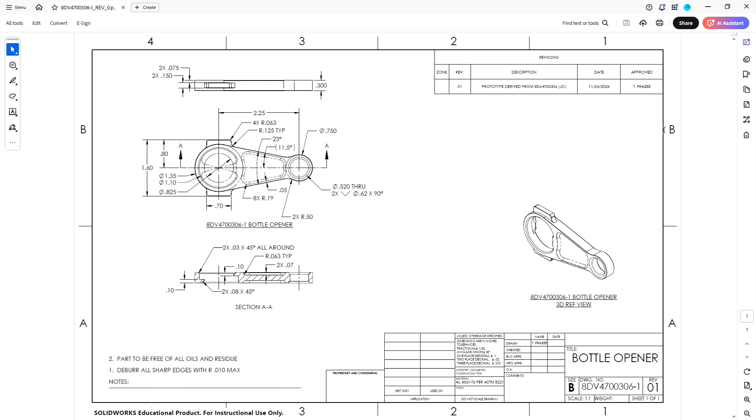We're going to start in the front view, and we're going to model the outside perimeter of the part first, the part that makes up these two big circles and the lines that connect them. We try to keep our initial sketches simple. It helps with change. And if we put our chamfers and fillets on at the end, then we're able to suppress those if we need to for machining.

Let's go to Fusion, and you're going to save your file as the part number, revision, first initial, last name. Make sure you save. That starts the auto saving for if you crash.

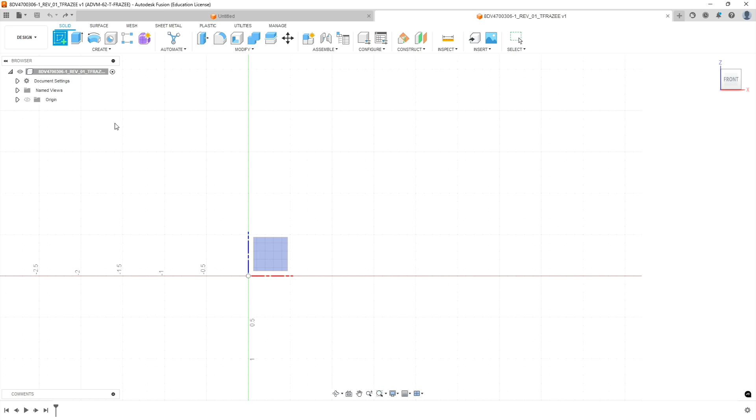The first features we're going to make are those two circles with the lines connecting them. So we're going to do a sketch, and we're going to start off in the front view. That's our primary view. We're going to pick origin, draw a circle on it, then draw another circle off to the right. You'll notice I'm not paying attention to the sizes, it's not important at the moment. We're going to put some relationships in, making sure those are horizontal to each other on their center line.

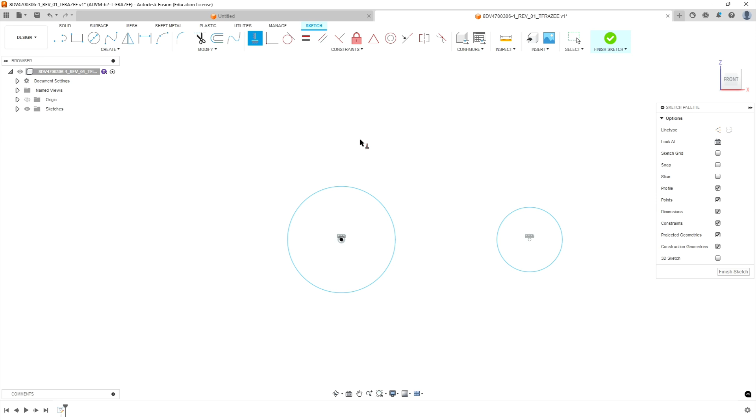Now we need to dimension them. Our first one, if we look at our drawing, is 1 inch 350 thousandths. Let's dimension that: 1.350. Our second one is 3/4 of an inch in diameter. Let's dimension that, 0.75 for 750. We now have them the correct diameters.

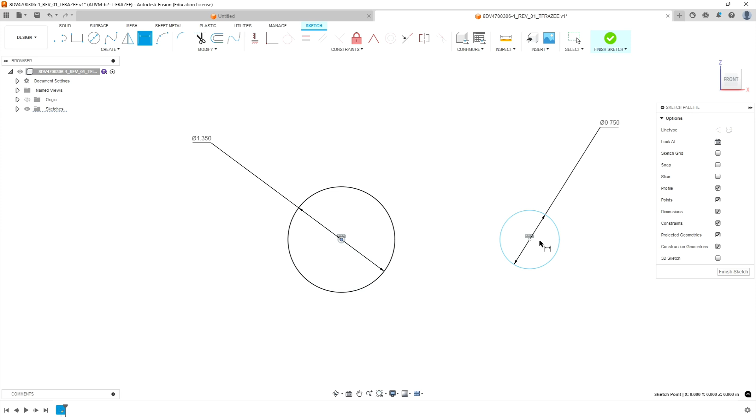Now, how far apart are they? The centers from here to here is 2 inch 250, so we're going to put that dimension in. Next, let's look at our lines. We have two lines make up the outer side. They're 23 degrees apart, and they're 11.5 degrees off center line, meaning it's proportional.

We're going to draw a line out in space, hit escape. Let's draw us another line out in space, hit escape. We're going to attach one end to the big circle, attach the opposite end to... we didn't want that relationship. We're going to attach the small end to the small circle. Now we're going to put in some relationships, so we're going to go tangent with the large circle. But if you look at the drawing, it's not tangent with the small circle, so make sure you don't put that relationship in by accident.

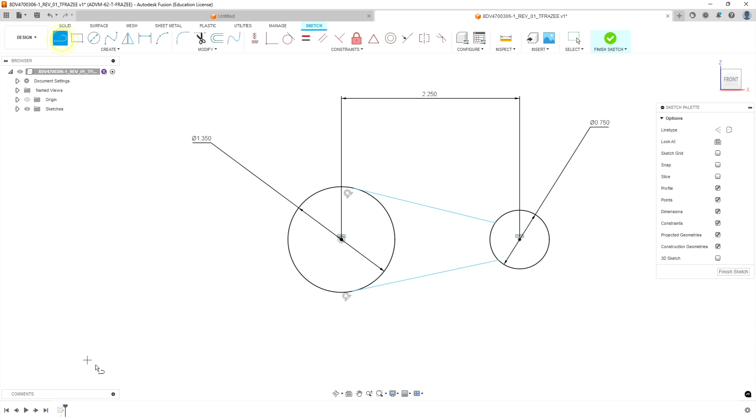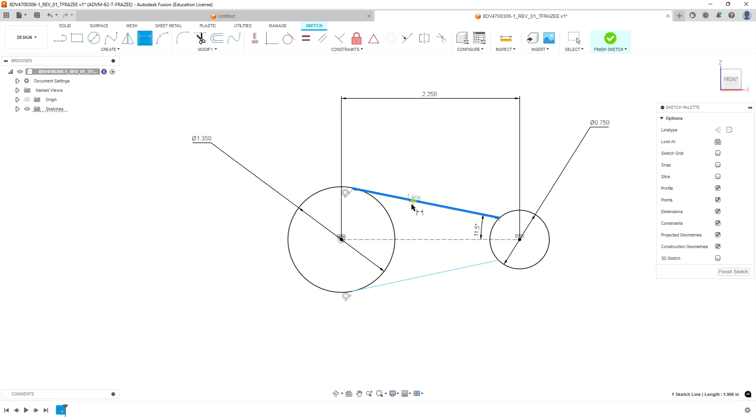Now let's draw a line from the center of each of the circles, and then right click on that line and make it a construction line. This is going to be used for our angular dimensions. So we're going to dimension from the center line to the first one and put in 11.5, which is half of our angle, and then we can dimension to the other line and put in 23 degrees, so that makes that proportional.

This should be, if you look at your sketches, a fully constrained sketch. Now you'll probably be tempted to put fillets in and stuff, but especially with this non-tangent edge, you could lose the definition you need there, so I'm going to choose not to do that.

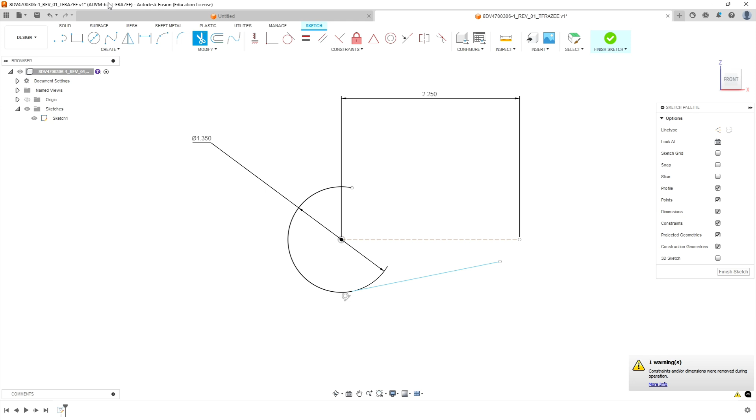Now let's trim away what we don't need. Don't need the inside of that circle, don't need the inside of that circle, don't need the inside of that circle. And you don't want to do that - I trimmed something I didn't want to, and we're going to trim inside of that circle. Okay, so this is the shape we're starting with.

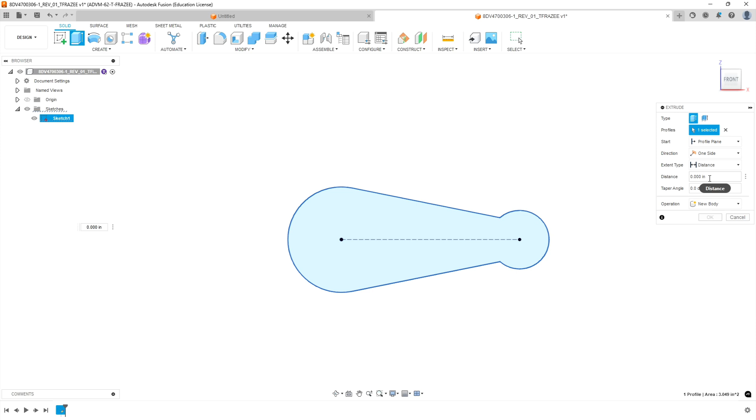We're going to go finish sketch, then we're going to do an extrude, and it's going to automatically select the sketch that you were working on. How thick is our part? Look at our drawing - in the top view, it says it's 300 thousandths thick. So we're going to put in 0.3. And if we rotate this to 3D view, it now has thickness. Looks like from this angle, it looks like an exclamation point. There we go, let's OK. Now we have our base shape.

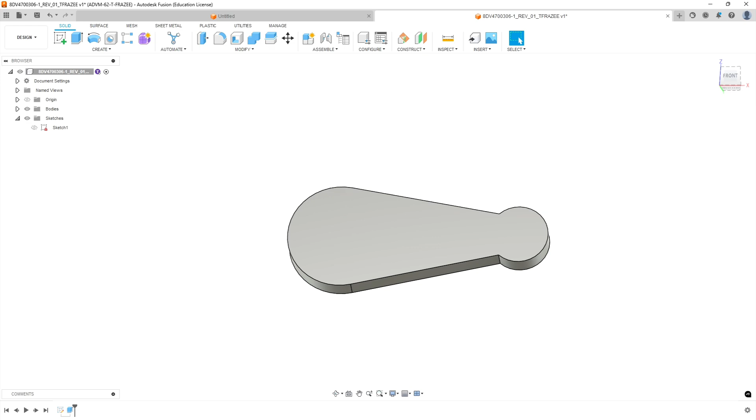Now, let's look at our outside perimeter and see what we're missing. We have this hammerhead looking shape. It is 700 thousandths wide by 1 inch 600 tall, and that feature is centered around what is origin in our model, or the center of this larger circle.

This feature we have to create a different way. It is right on center line in the top view, and it's 150 thousandths thick. So how we're going to approach this is we're going to actually model this mid-plane of this part.

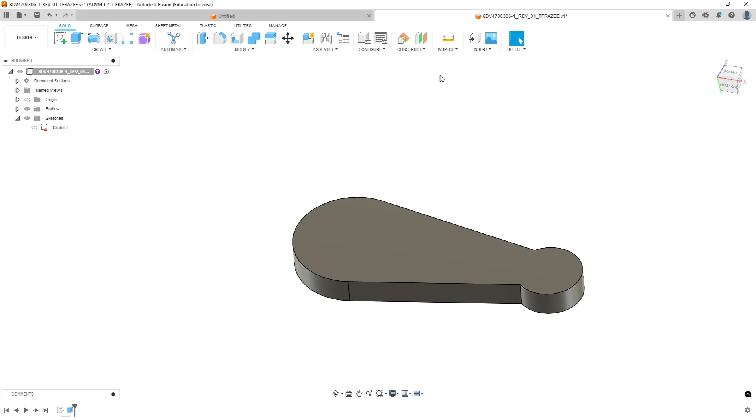Okay, so to do that, we first need to make our mid-plane. We're going to go to construct, and we're going to make a mid-plane. This allows us to select two surfaces, and it'll automatically make a plane splitting it down the middle. So no matter what size, if we do have a design change and we change the thickness of our part, at least whatever's defined on this plane will always be on center line of its thickness. We're going to hit OK.

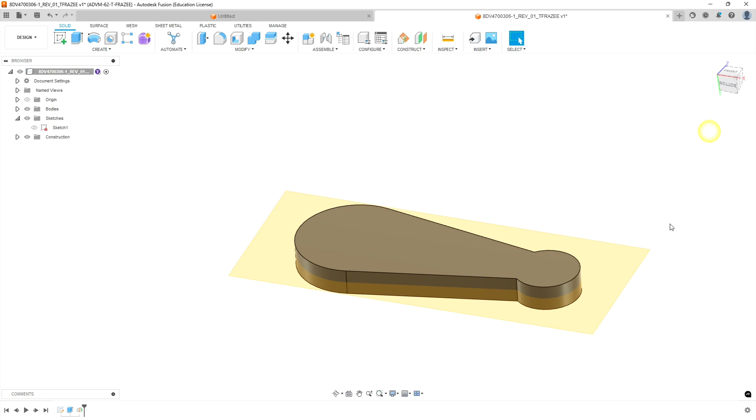Now we're going to create our sketch on that midplane. Let's draw a rectangle, and then we're going to draw a line from corner to corner so we can center this rectangle on the circle. So escape, so that we exit the line tool, right click on our line and make it a construction line, and then we're going to go from midpoint of the line to origin. Looks like I got extra selection there, but anyway, now this is centered on origin.

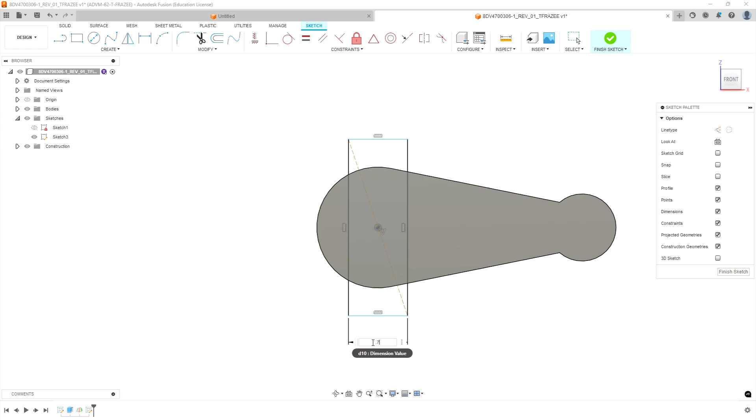Now let's give it its width. So our width is down here in our drawing, was 700 thousandths, and then the height was 1 inch 600. 1.6. Okay, and that gives us our fully constrained sketch. We're going to hit finish sketch.

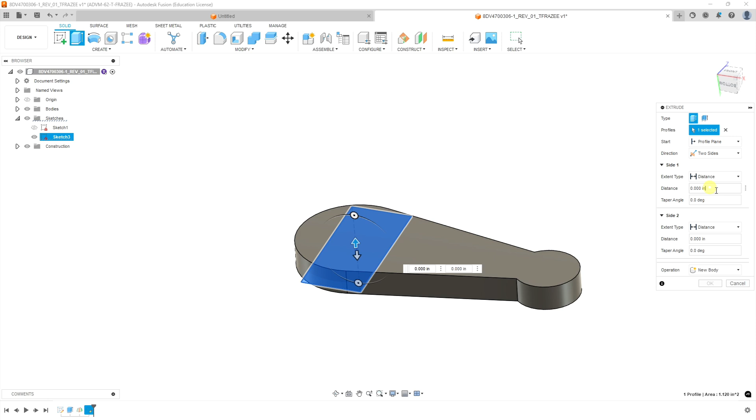We're now looking at it in a 3D view, and we're going to do an extrude, and it's coming from that plane that's right in the middle. So what we're going to do is, instead of one side, we're going to do two sides, and then we're going to split the difference of our extrusion. So our extrusion was 150 thousandths thick. So that means we need to go a distance of half of that. 0.075, that's 75 thou on one side and 75 on the other.

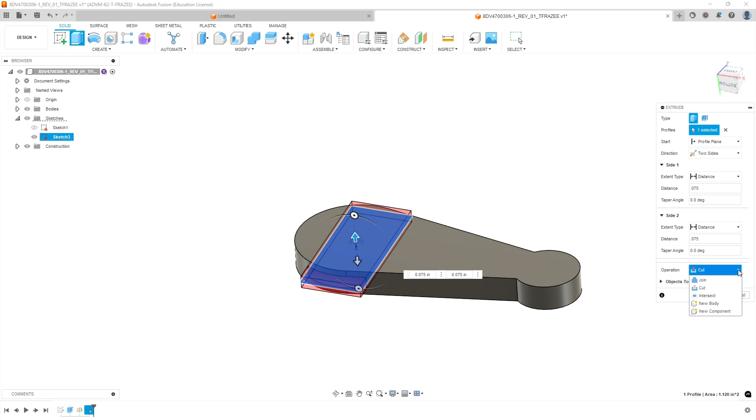Now we could have selected symmetric, then we could just put in the same value once. Guess that would have been smarter. Alright, let's hit OK. And we're not doing a cut. We want to change our type to a join, so it's going to make one body out of this, and we hit OK. There we go. We've got our rough shape of the outside of the part.

Okay, now let's look back at our drawing. We're still looking in our primary front view. What do we have that would be a silhouette? So we've got this cavity here, which is made up of a bunch of arcs, and then we have this hole here. Now we could make this a simple hole, or we could use the hole wizard.

Problem with hole wizard, it doesn't put the countersink on both sides automatically. I'm going to come back and use a chamfer tool to make that. That way when we make the chamfer on one side, we'll make it on the other, and they'll be parametrically tied together. So let's do all the through features first. Let's just start with this hole here.

We're going to sketch on our top plane. We're going to draw a circle. You're going to hover over the circle's edge, and if you bring it to center, it should auto select the center to make it concentric. Now I have noticed in different iterations of Fusion this sometimes doesn't work. Not a big deal, you just come back and make it concentric after the fact.

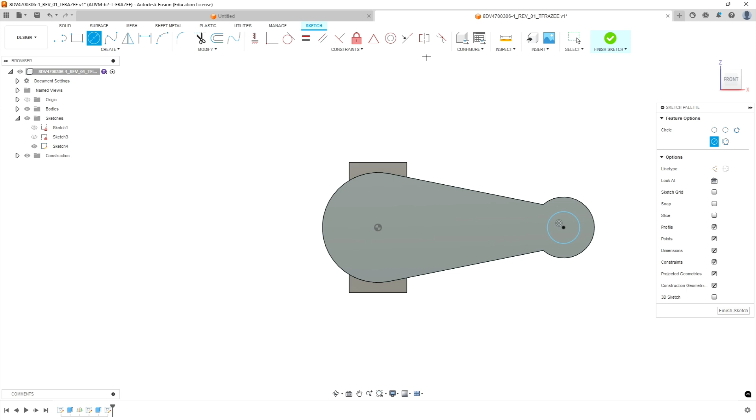Okay, we got our circle, and our basic diameter is 520 thousandths, and it's a through hole. Goes all the way through the part. So we're going to dimension that, and it's going to be 0.52.

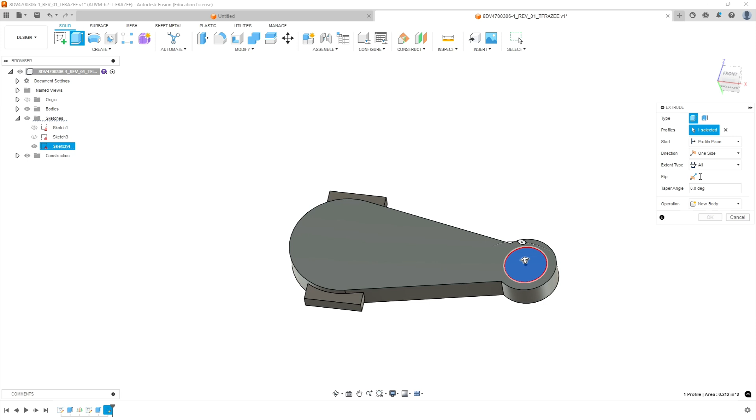We're going to finish sketch, and then we're going to go ahead and extrude that through. You're going to pick on the hole, and we're going to go all the way through, and we're going to flip sides so it should look red like this, and then hit OK. We now have our through hole on the back side.

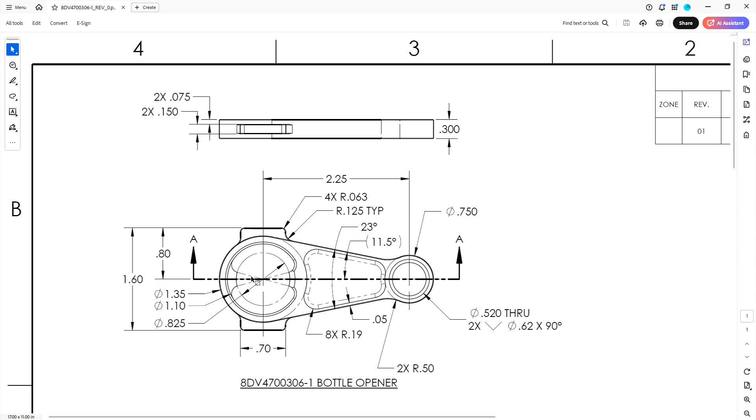Now let's take a look at this more complicated hole we have over here. We're going to do this as its own dedicated sketch. So what we have here is a large diameter, and that's a window through, but then we have a tooth here and another tooth on each side of the part. And the depths of those teeth are defined here. So we're going to end up needing to make cut features from both sides of the part in order to make this come out correctly.

So let's start with what would be the edges of the top of our cutout here. So our first diameter is this 1.10 dimension. Okay, so we're going to work large and work our way down. So we got 1 inch 100 thousandths, and so we're going to sketch on the top plane, and we'll start off by making a circle. Starts at origin, and then we're going to dimension that, and it is

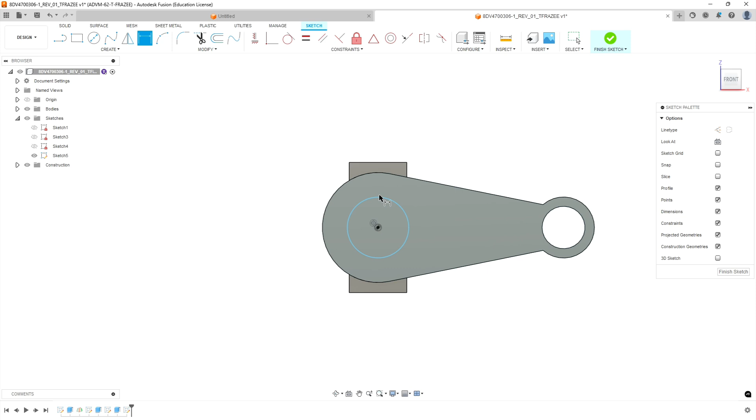1.1, 1.10. Okay, now we have this tooth feature in here that we need to draw on the right hand side because that's in the plane we're working in. And it has an inside diameter called out to it, and its inside diameter is this 825 thou. Okay, so let's draw that circle.

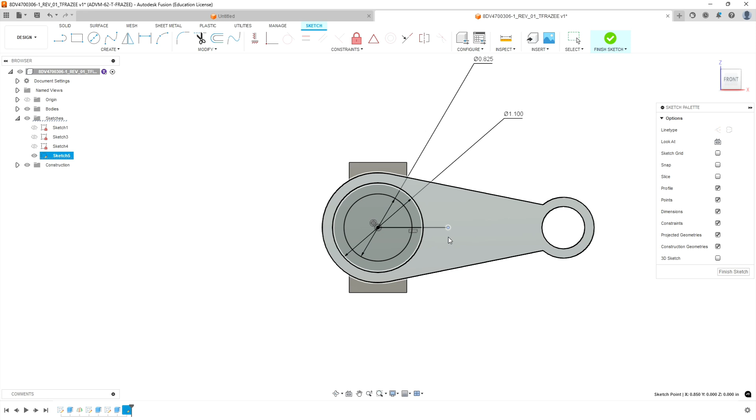Okay, next we're going to construct the tooth that's going to cut through. So what we do is it's an angled line. We're going to go from center line to horizontal and create a line. And we're going to drag that back so that it intersects. Well, if you can't get it to intersect, have it intersect the outer circle.

Okay, we're going to draw a series of lines. We're going to go from the small circle to the big circle, and then we're going to draw another one from small circle to big circle. We're then going to make a relationship with those two lines that they are coincident with center of the big shape, the circle. And then that way, no matter where they are, they're always radial to the center of the circle.

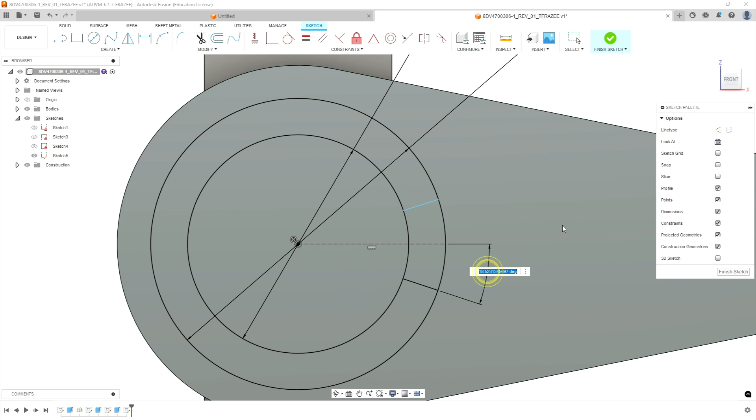We then need to dimension them. So the drawing has this at 23 degrees apart. So make sure you hit escape so you don't have things that you don't want selected. So I'm going to select the center line, I'm going to select the lower line, and we're going to put it at 11.5 degrees, and then we're going to dimension the two 23 degrees apart. So that gives us our clocking.

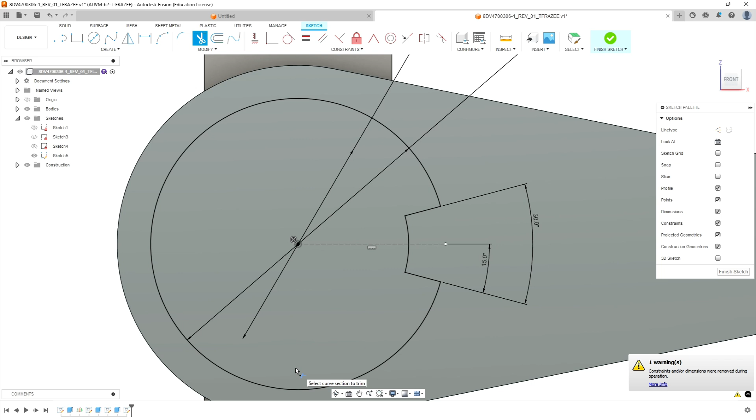Now let's trim away what we don't need. We don't need the rest of this center circle. And we don't need the inside of this circle. Now this little piece here, I now made my center line no longer connected to this arc. So my sketch is no longer constrained. So to fix that, it's pretty easy. Just click on that endpoint, make it coincident with your other arc, and look, that's now constrained.

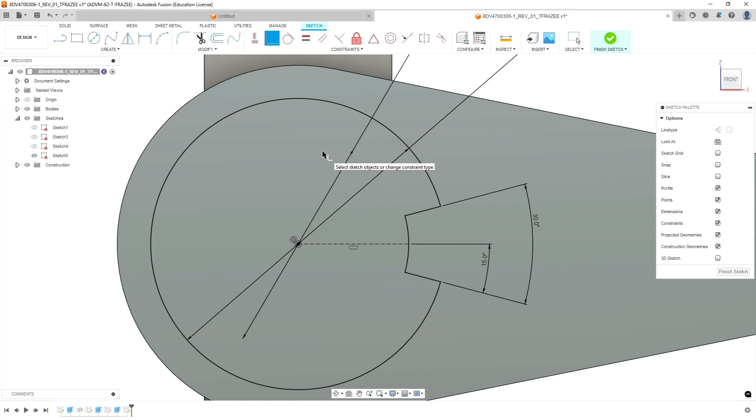Okay, so this is our basic cookie cutter. We're going to cut most of the way through the part. So we're going to finish sketch, and this profile is going to cut through the part up until 100 thousandths from the bottom. Okay, and then we have to make another cut from the other side.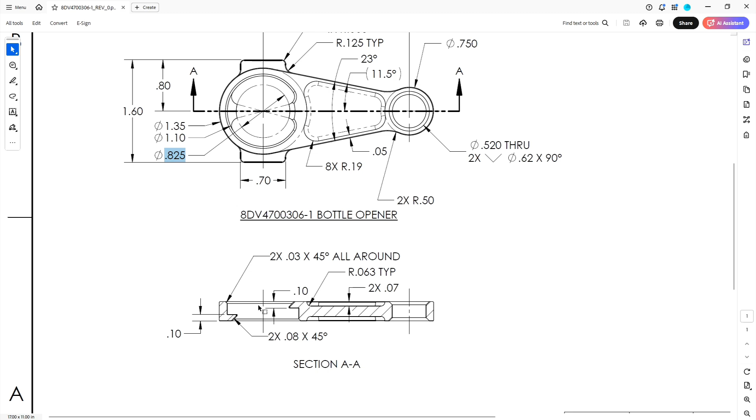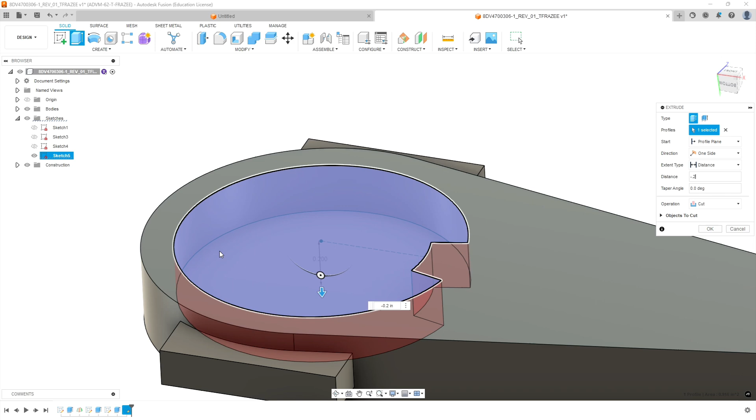So let's do that. We're going to do an extruded cut. We're going to do inside that profile. We're going to go negative 0.2 because our part is 300 thousandths thick. The flange on the other end is 100 thousandths thick. So we're leaving the material to allow that to exist. And we do want to cut, that's why I put it in a negative value and hit OK.

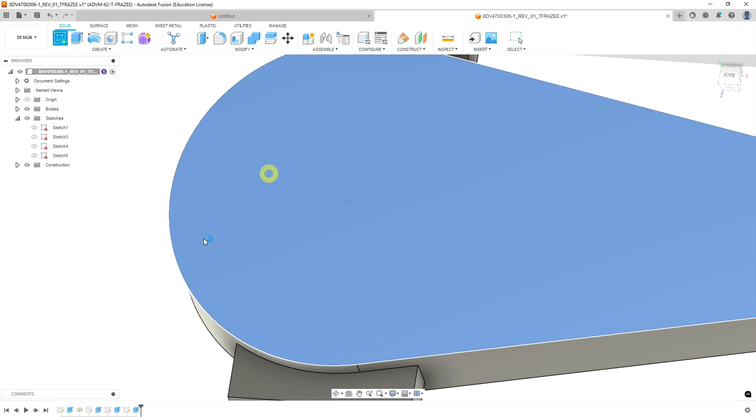Now we need to make another cut from the opposite side of the part that's very similar. So we're going to sketch on the other side of the part. And we're going to draw our two circles. This first one was 1.100 inch, and the other one was 825 thousandths. So we have our dimensions, and we're going to repeat what we did on the left side.

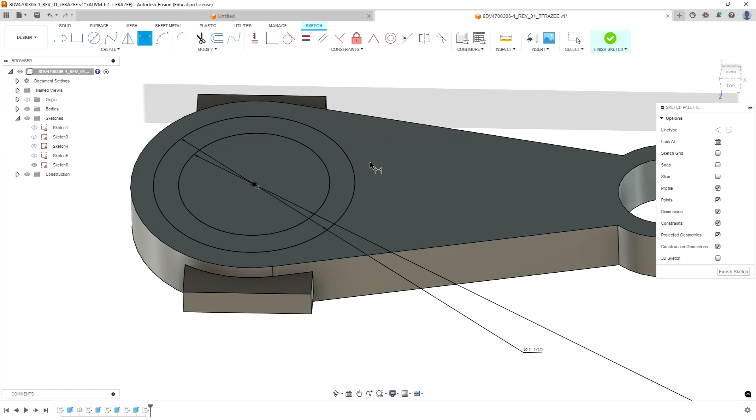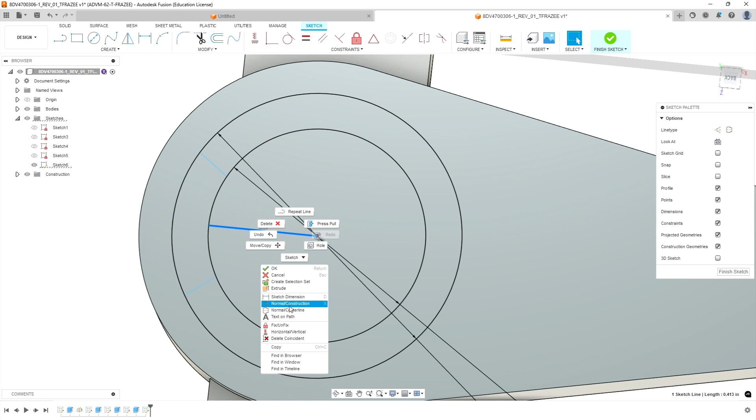So we're going to draw a couple lines. And then we're going to draw a line horizontal from center line. We're going to make that one a construction line. And we're going to take the bottom line, you're going to highlight the whole line. We're going to make it coincident with the center. Second one, we want to do the same thing. So that lines it up coincident so that it's radial.

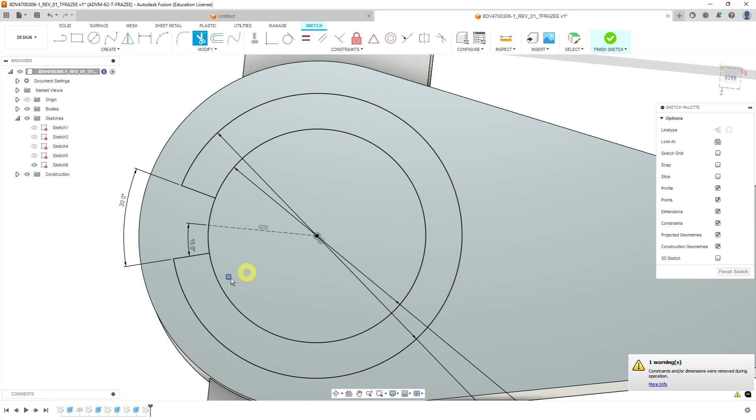And then we put in our dimensions from top to bottom. This is 15 degrees, and then they're 30 degrees apart, centered on center line. Okay, we should now be able to go in and trim what we don't need. So we don't need that center piece. We don't need the center circle. We just have this tooth looking component.

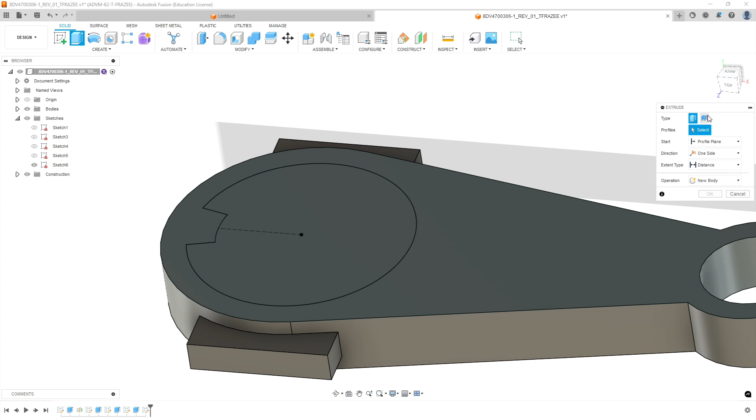Okay, for this cut, we're going to do more or less the same thing. You're going to finish the sketch. Make sure you got a fully constrained sketch. We're going to select the inner profile, and we're going to put in a negative 200. It's going to go in the opposite direction. It turns it into a cut, and it should cut away the other volume. So we now have our circle with our two teeth in place.

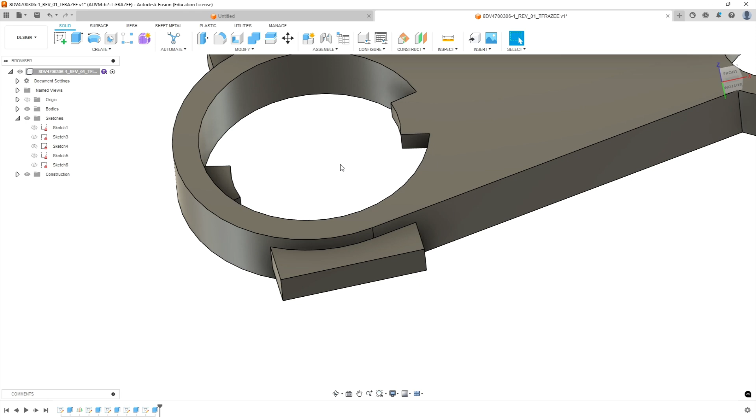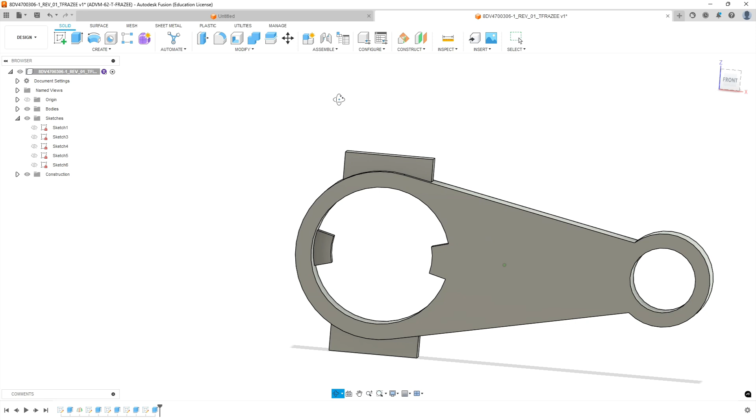I'm sure there's other ways to approach it, but that worked for me. I guess you could have cut the round circle and then extruded out one tooth and maybe patterned it to the other side, but that's how I approached this. Okay, so we've got the major features created except for the pocket that goes in the center here. So let's do that. Let's do our pocket in the center.